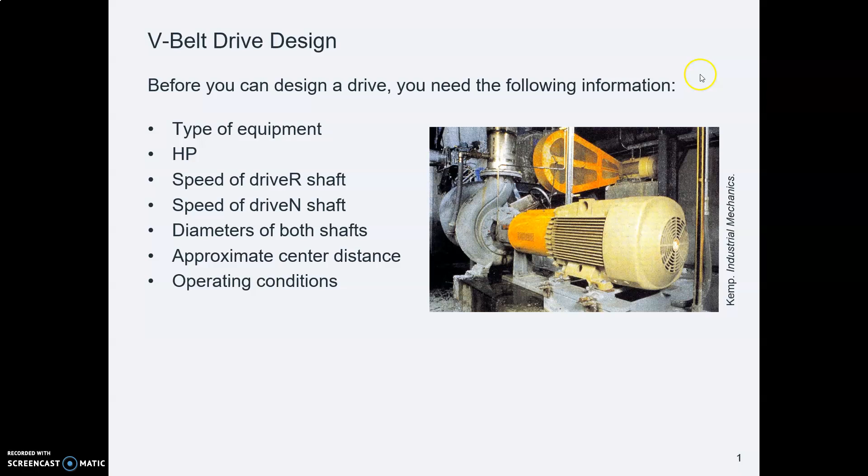Let's look at how to design a V-belt drive. Design means we're going to pick out the sizes. Before you can do that, you need to know some things, like what kind of machinery you have, what kind of motor you have, and what speeds you need. We'll see why as we go along.

Let's practice on this example. Let's say we have a fan, a big fan. It's got a 10 horsepower motor, 1800 RPM, and it's going to run 18 hours a day. The motor is 1800 RPM. We want the fan to turn 1120 RPM.

We're going to start out with a center distance of 20 inches. So from the center of one sheave to the center of the other is 20 inches. We might have to adjust that later on, and that's okay, because we're the designers. To adjust that, we might have to modify where we locate our motor mount, for example. All right, here we go.

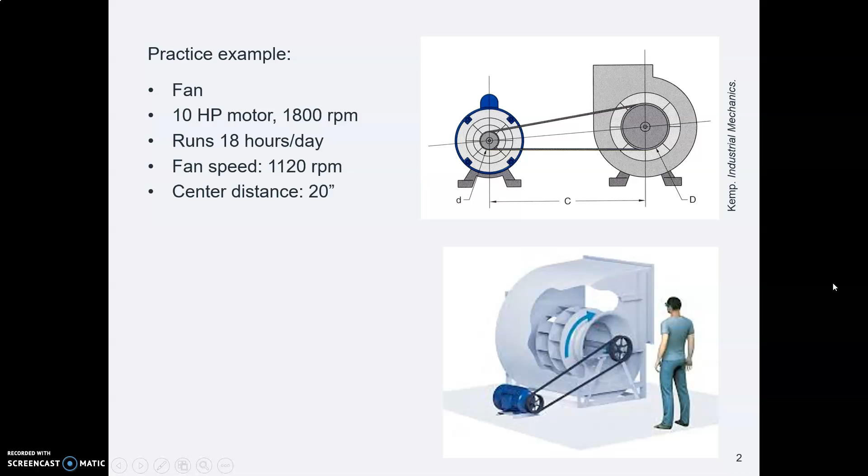So we've got a fan, and we need to find the design horsepower. This fan has some operating conditions, and even though it's a 10 horsepower motor, we might need to pick out belts as if it were a bigger motor.

So first, we'll find the service factor. This is a table out of our book. You can get these tables from equipment manufacturers, belt drive suppliers. So here's the one we're using. We look through here and we see, can we find fans? Yes, there it is. There's fans up to 10 horsepower.

Now, we're operating 18 hours a day. So which one of these three columns do we need? We're 18 hours a day, so we're over here. So that means we have a service factor of 1.2.

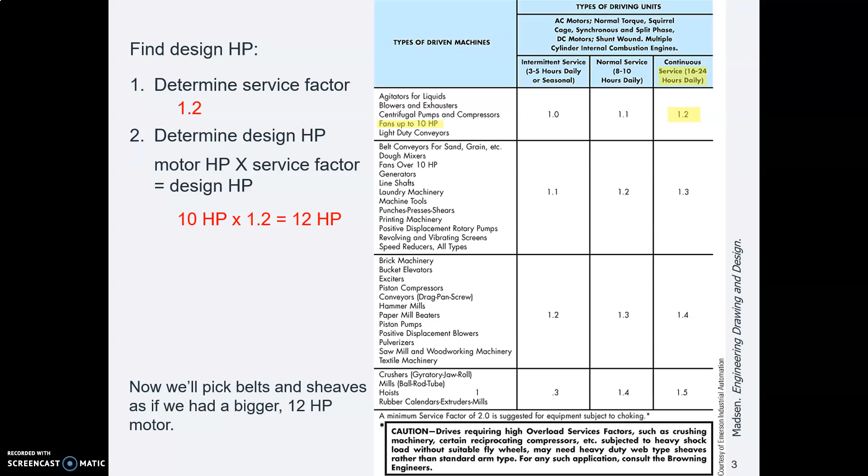That's what we multiply times our motor horsepower. We have a 10 horsepower motor, but a 1.2 service factor. 10 times 1.2 is 12. So we are going to have to select V-belts and sheaves as if we were running a 12 horsepower motor.

Now let's decide what size of belt we need. We'll use this chart, and first we'll look for the motor RPM, that's the faster one. We have an 1800 RPM motor. It's right about there. We have a design horsepower of 12. It's right about there. And those two things intersect in this area of the chart, which appears to be the A area.

So we need an A belt. In other words, we need the smallest, least expensive belt. We don't need a big thing, so we're going to be able to use an A.

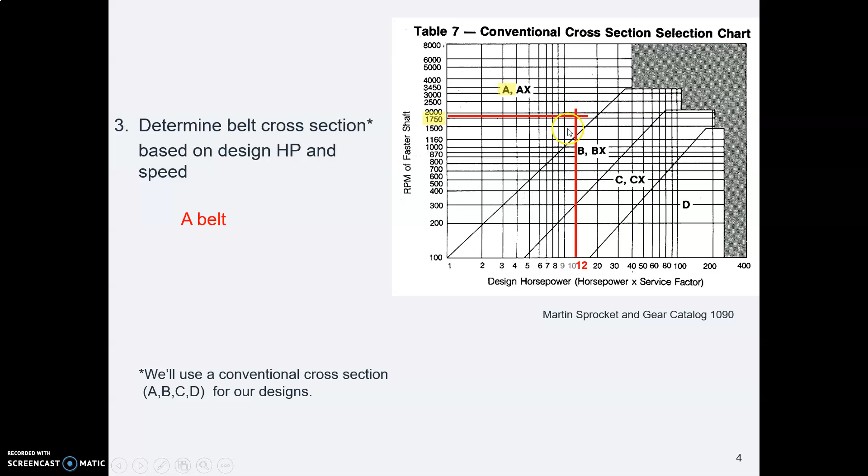Now in this chart, we need to find what is the minimum diameter we can use on our smallest sheave. We can't just go really, really tiny. We could not use a 1-inch diameter sheave. That would not work. So there's some minimum size based on what our motor speed is and our horsepower.

Notice that 1800 RPM is not one of the choices. That's because motors are not actually 100% efficient, they're a little bit less than 100. So if your motor says that it's 1800 RPM, its actual speed is closer to 1750, so we'll use that. Then we have a 10 horsepower motor, and in this table it does not say design horsepower, it just says motor horsepower, so we'll use that.

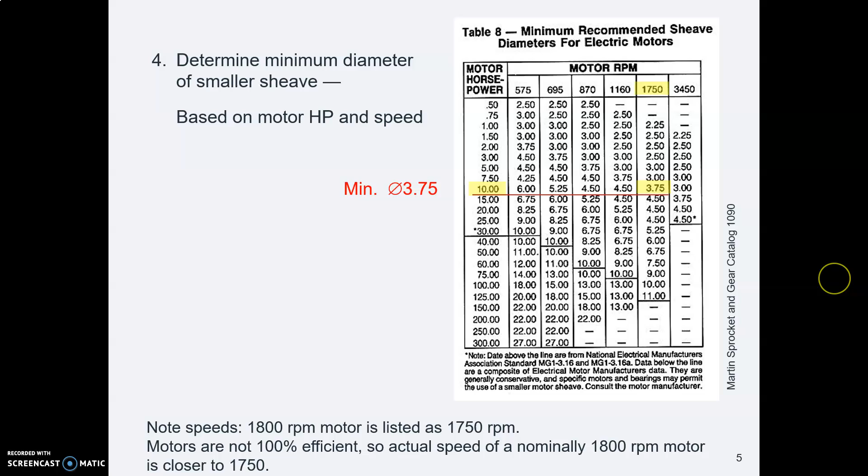Okie dokie. According to this chart, we cannot use a sheave that is smaller than 3 3/4 of an inch diameter. And by the way, that's not the outside diameter, that's the pitch diameter. So in that way, it's just like with gears, it's the pitch diameter that we're thinking about.

Now let's figure out the speed ratio. Sound familiar? We did this with gears. So the fast speed divided by the slow speed. 1750 divided by 1120, our speed ratio is going to be 1.56.

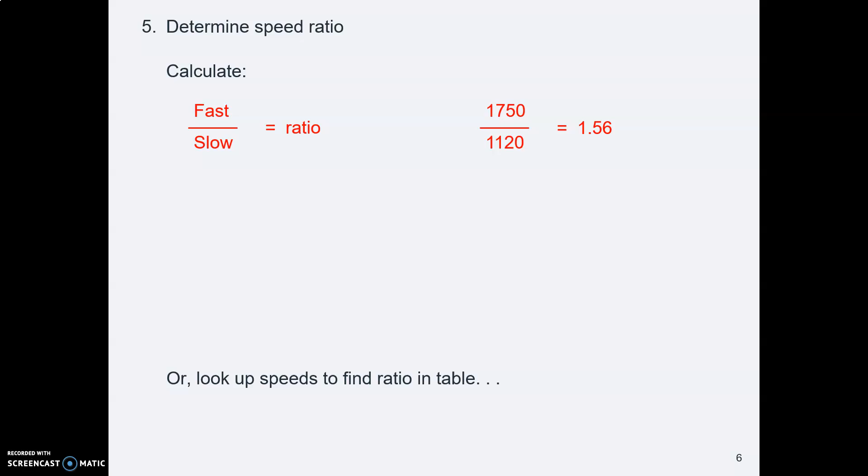Or we could look it up in the table. Here's our belt drive table, this is out of our book. And here's what to do. Over here in the middle of this chart, the manufacturer gives some two motor speeds, 3600 or 1800, which will actually be 3500 or 1750 RPM.

So we're going to use the 1750 RPM because that's our motor. And we want the slower speed to be 1120. Well, in this chart, the manufacturer is telling us if you use 1120, well, 1122, you'll have a speed ratio of 1.56, which is what we just figured out. And this is not exactly 1120, it's 1122, but 2 RPMs difference is negligible, so this will be just fine.

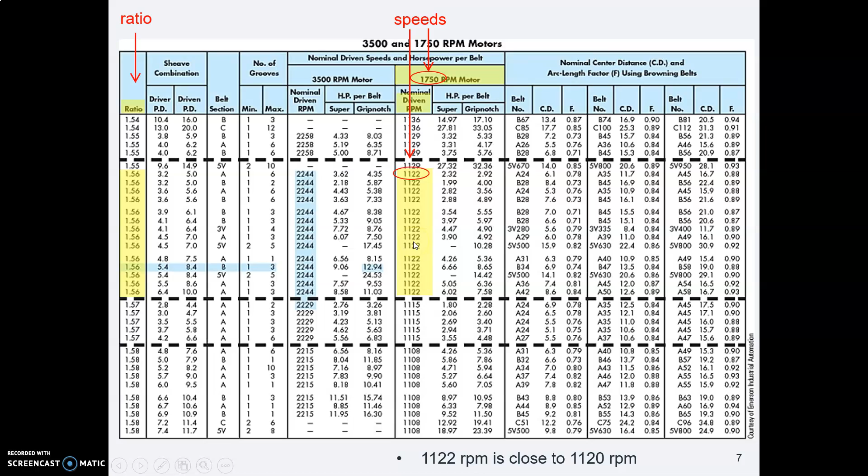So this is the range that we'll be looking at. Now, in this speed ratio range, some of these are for A belts, some are for other sizes of belts. We don't want those, we want A belts.

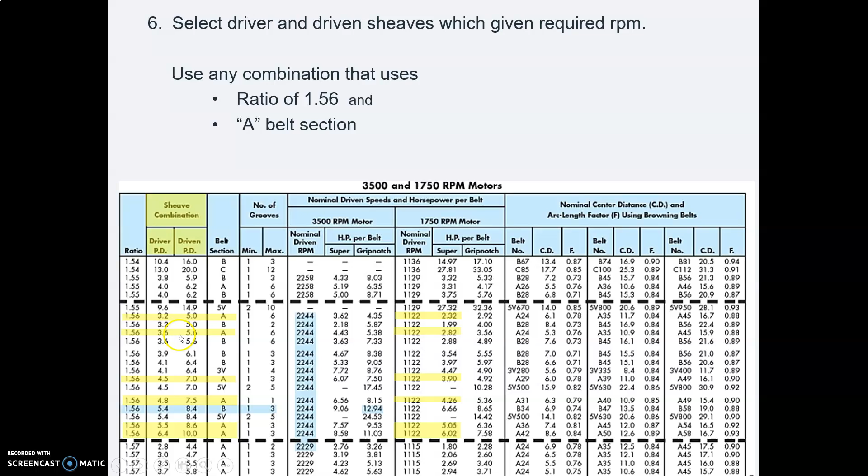So we'll just look for what combination of sheave gives us this speed ratio. But we can't use those two, they're too small. We figured out that we need at least 3 3/4. So we could use any of these others. Let's use this combination just for the heck of it.

This chart here is from the book, as I mentioned.

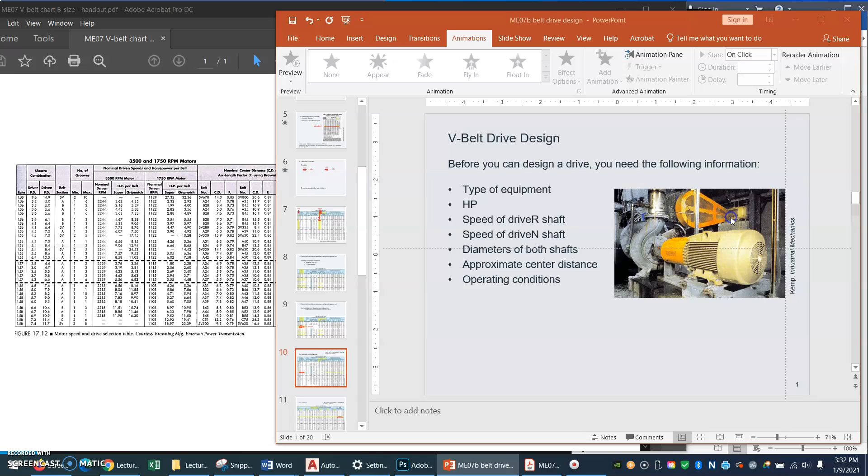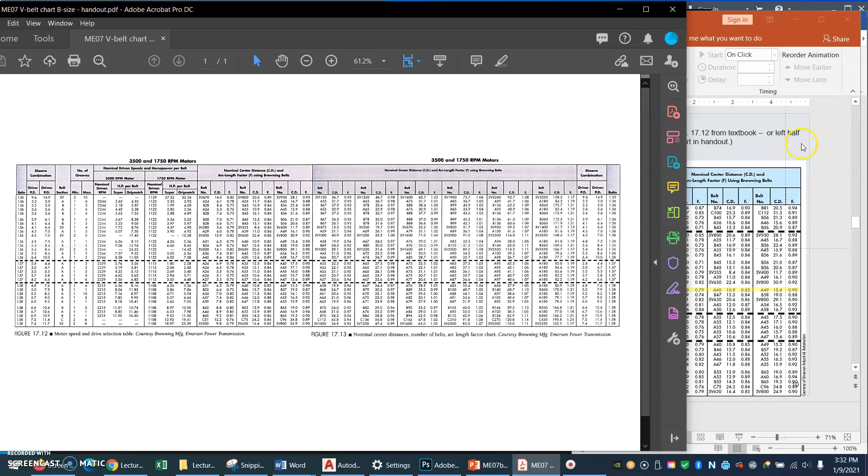Let me show you. I gave you a handout, a PDF, that has the full chart stretching all the way across from side to side. In the book, he puts the right half on one page and the left half on the other page. So here's the right half, here's the left half of the chart.

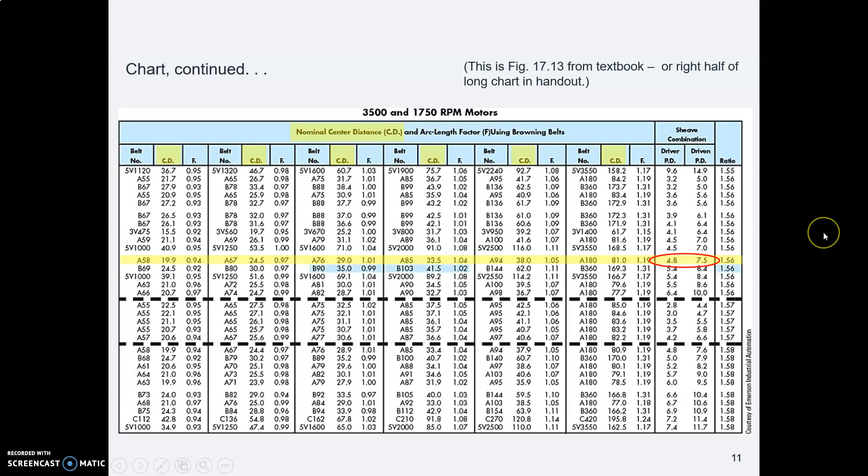We're going to use this sheave combination. Here's the right half of the chart, and they list the sheaves over here again. And we want to find one of these belts that has a center distance closest to the one we want. So here are the belt numbers.

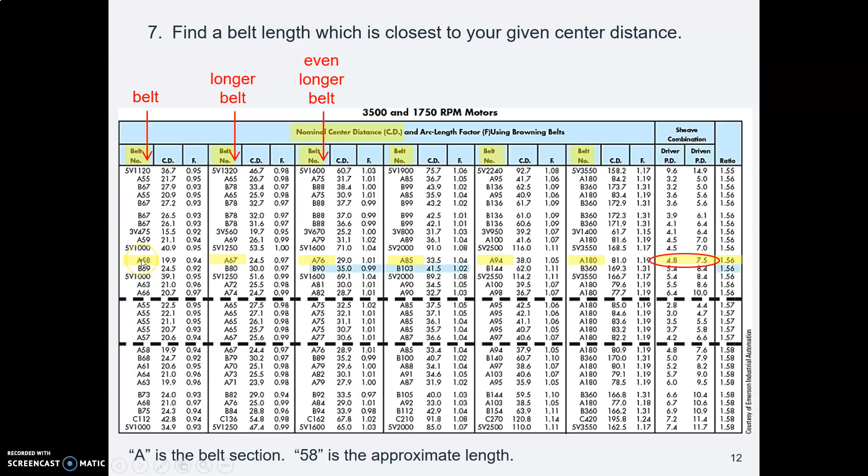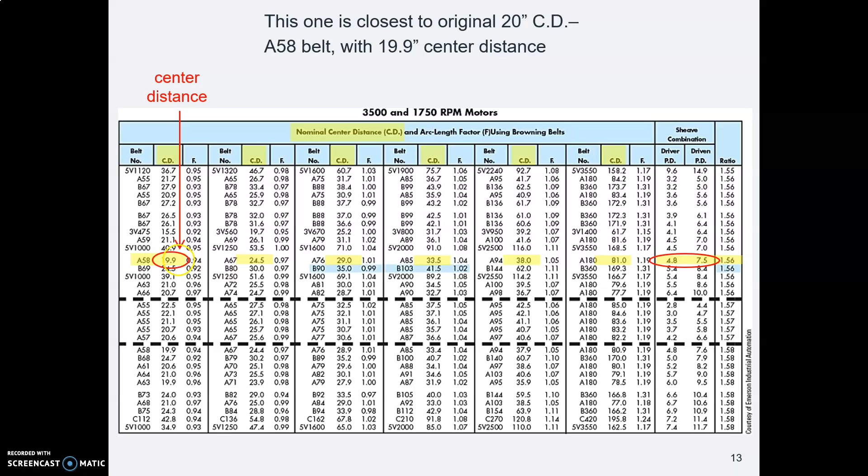58 means the belt is about 58 inches long, 67 is about 67 inches long, and so forth. Each of those belts has a center distance listed next to it. Well, this belt right here, the A58, has a center distance of 19.9. That's pretty close to our original center distance. We're starting with an ideal of 20 inches. These other belts are not going to work because their center distances are even longer. But this one, A58, that's pretty close. So we'll use that one, and in our design, we'll just adjust our center distance to be 19.9.

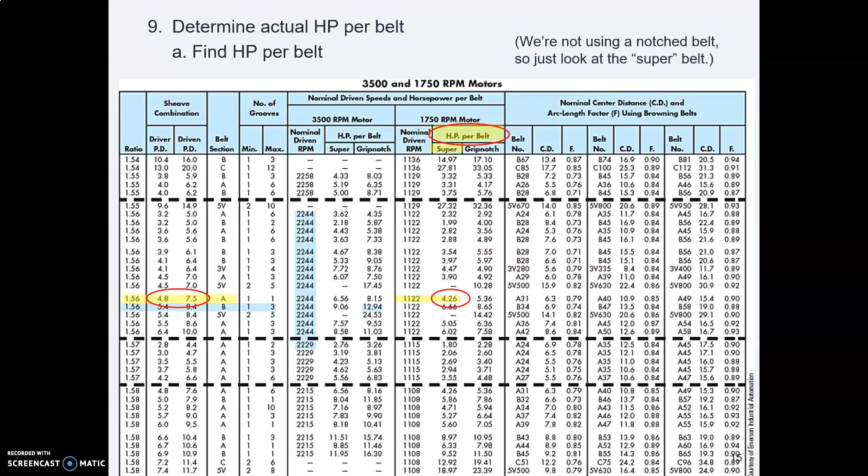Now let's figure out how many horsepower per belt we are going to be able to pull, because we want to find out how many belts do we need. So here's our sheave combination. Here in our motor speed, it lists horsepower per belt. We have a capacity of 4.26 horsepower for each belt.

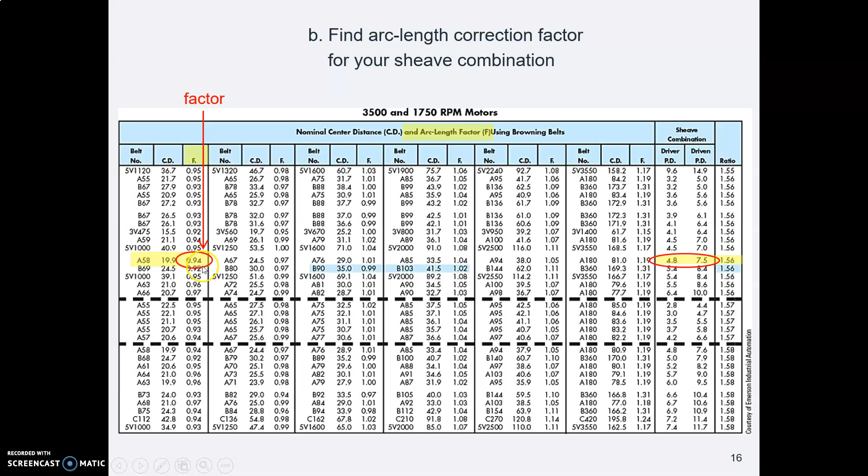But there's a correction factor. And in this chart, they say F stands for factor, that's the arc length correction factor. So here's our belt, A58, there's our new center distance, here's the correction factor. What is that about? We are going to multiply the horsepower per belt times the correction factor we just found, and we come up with a new horsepower per belt.

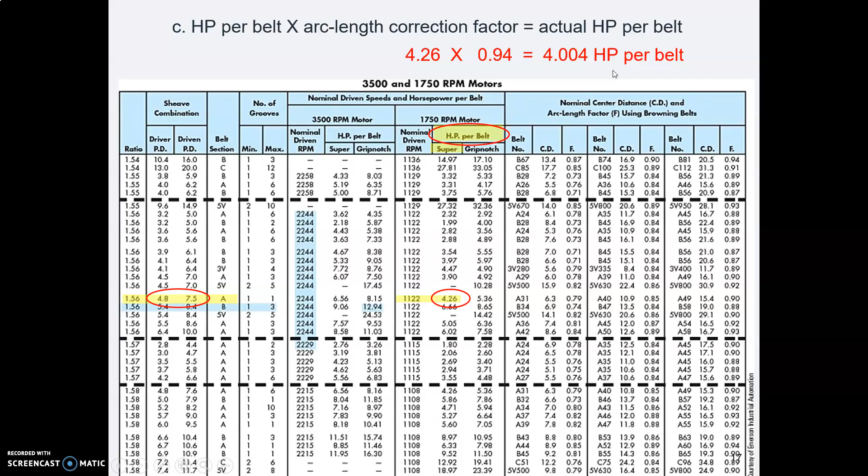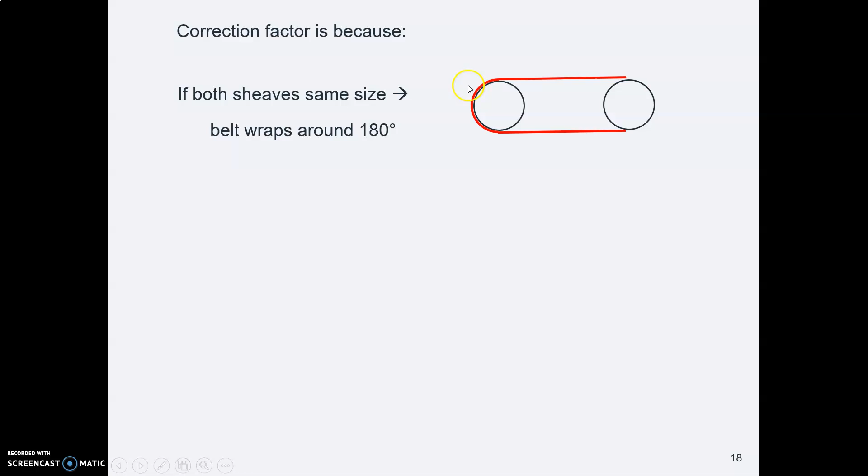We can actually only pull 4.004 horsepower per belt. Why? If you had two sheaves that were the same size, your belt would be wrapping all the way around a full half of each sheave, so that's a good distance of wrap. But if one sheave is much smaller than the other one, look what happens to the angle of the belt, and look at what that does to how much belt wrap you get. If one sheave is much smaller than the other, you don't have as much belt length grabbing that groove in there and keeping things turning. So your capacity for turning this thing is less if you have a little tiny sheave.

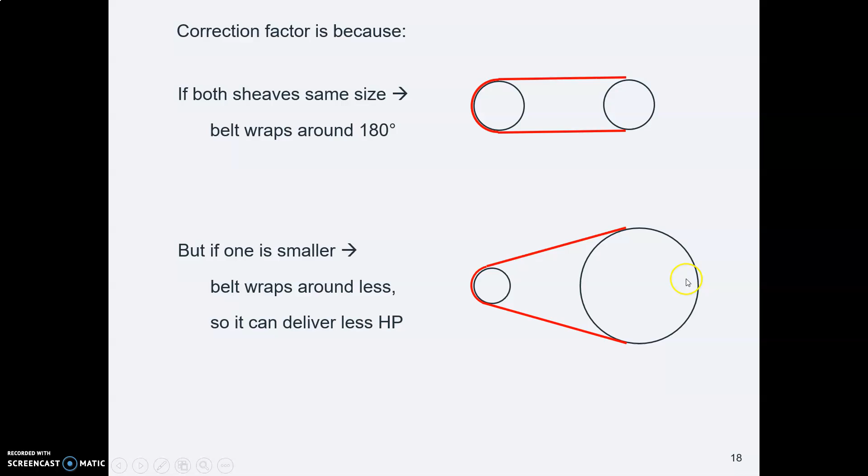So that factor we looked up was related to what is the relative distance between them and size difference, and each one of those combos gets a factor. So we had to reduce our actual horsepower per belt by some factor because we don't have 180 degrees of belt wrap in our combination.

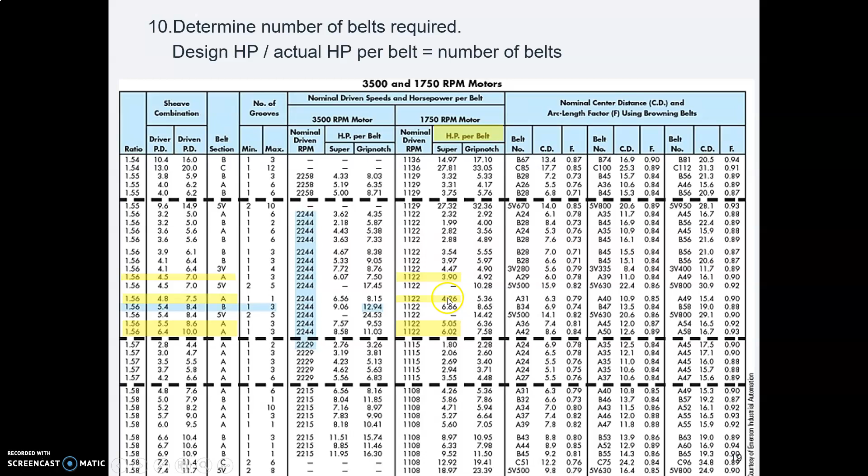Okay, now let's figure out how many belts we need. We just looked up the horsepower per belt and a correction factor. So now let's figure out how many belts that means. What was our design horsepower? We had a design horsepower of 12. Remember, it's a 10 horsepower motor, but we had a 1.2 service factor, so we are designing our belt drive as if it were a bigger motor, as if it were a 12 horsepower motor. And we just figured out that we have a capacity of 4.004 horsepower per belt. So obviously we'll need more than one belt to be able to pull 12 horsepower.

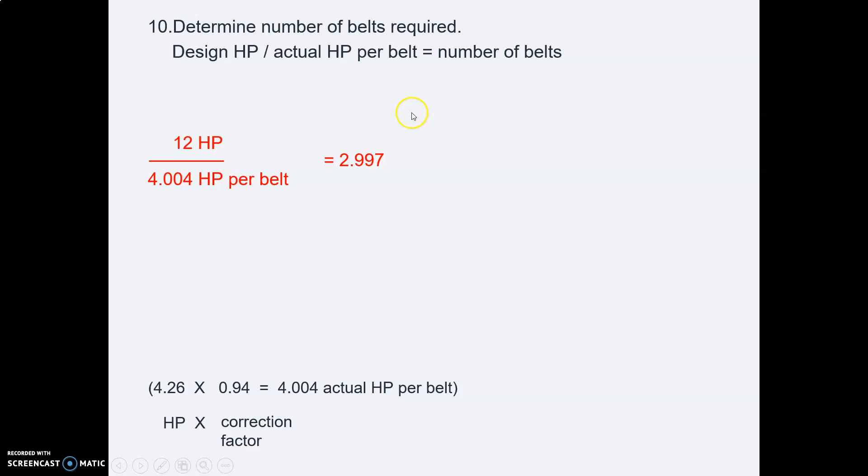How many belts will we need? We'll say design horsepower divided by that actual horsepower per belt that we just found. We get 2.997. Well, we can't have 2.997 belts. We could have 2 belts, or we could have 3 belts. Would 2 belts be enough? No, it would not. We need more than 2 belts. So we're going to need 3 belts. Even though I know this is close to 3, but it's not 3, and so we need 3 belts.

Can I just say, if you find yourself with a belt drive where it tells you only need 1 belt, it's good practice to specify 2 belts anyway, and here's the reason. If you're out on the job site, or your customer is out on the job site, and a belt breaks for whatever reason, if you've only given them 1 belt, when the belt breaks, that's it. They're shut down until somebody goes somewhere and gets a new belt. But if you have given them a 2-groove sheave with 2 belts, if 1 belt breaks, they can limp along and keep running on the 1 belt while somebody goes and gets another set of 2 belts to install.